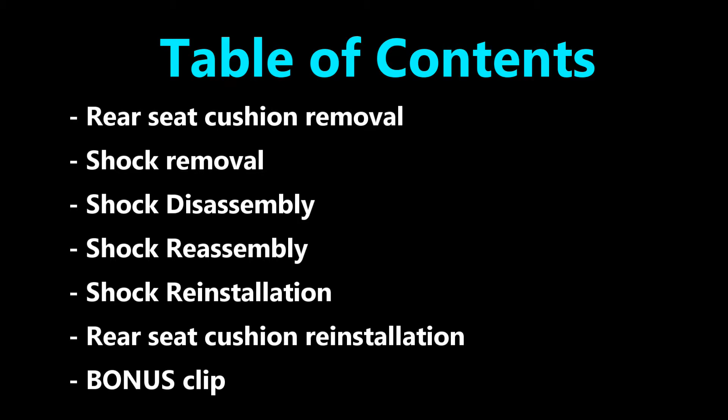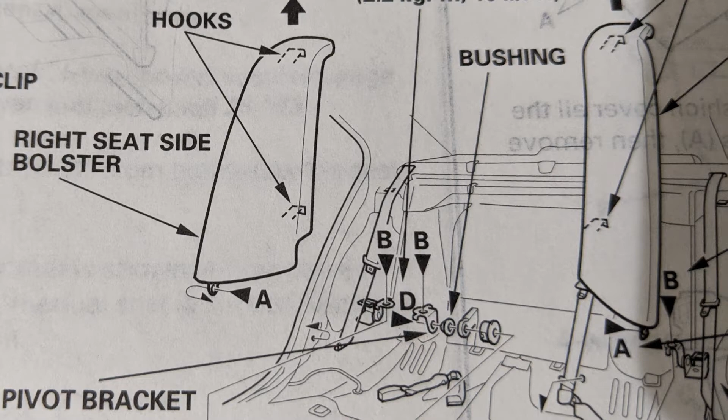With the car on the ground, I started by gaining access to the top of the rear shocks through the back seat. Use a 10mm socket with an extension to reach a bolt near the driver's side seatbelt buckle. Yours may already be removed. Remove the bolt.

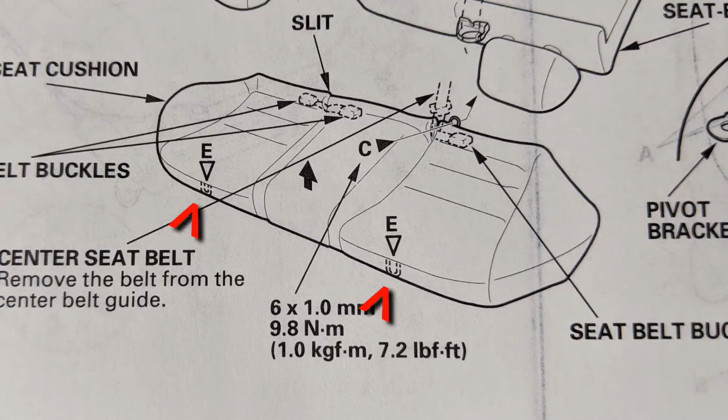The lower front edge of the rear seat cushion has metal hooks that lock into a clip. Lift up to unfasten it. There's one on each side. Now you can lift the whole cushion out of the car. The seat side bolsters have a 10mm bolt at the bottom. Remove it.

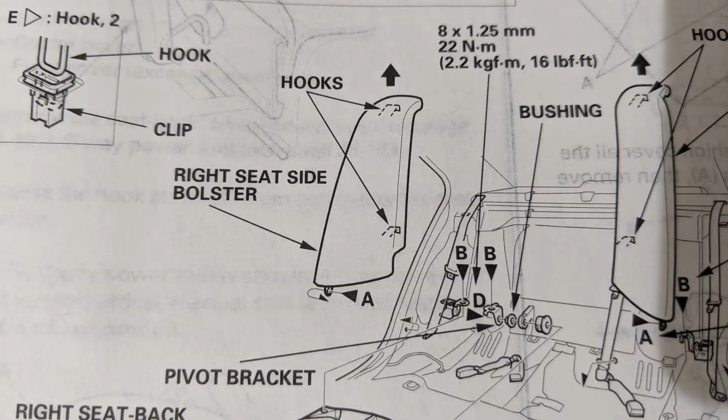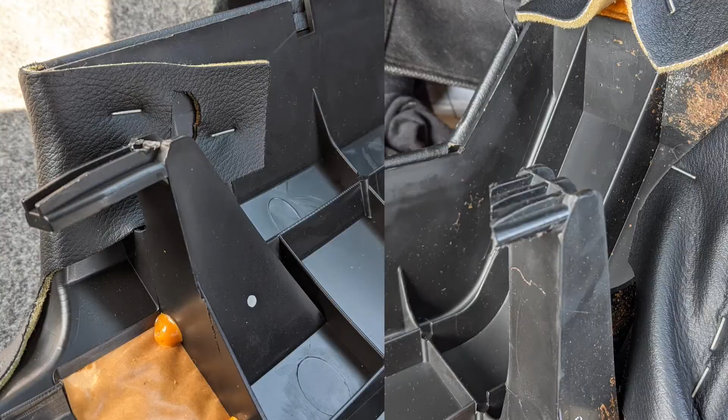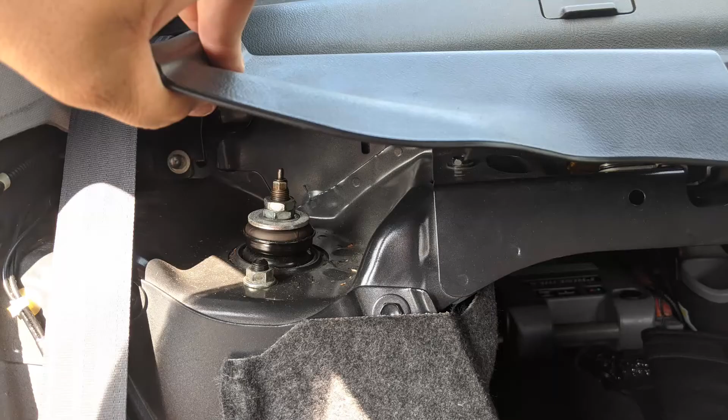Bring down the rear seat backs one at a time. Lift up on the seat side bolsters to remove them. You can't just pull them towards you because they're hooked into some holes. You can see the top of the shocks from here. There are some plastic clips that are holding in the rear shelf. To gain more space to the top of the shocks, lift up on the rear shelf.

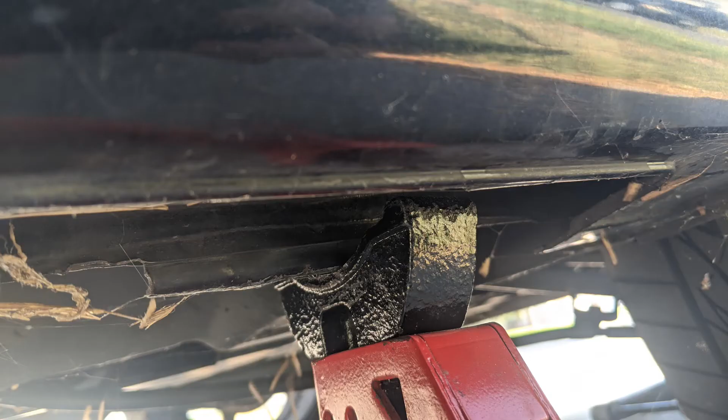It's time to jack up the rear of the car. My car is parked on a slight incline, so I chock the front wheels to prevent the car from rolling back when I jack it up. You're going to jack up the rear from the rear tow hook. Set your jack stands under the pinch welds and remove the wheels.

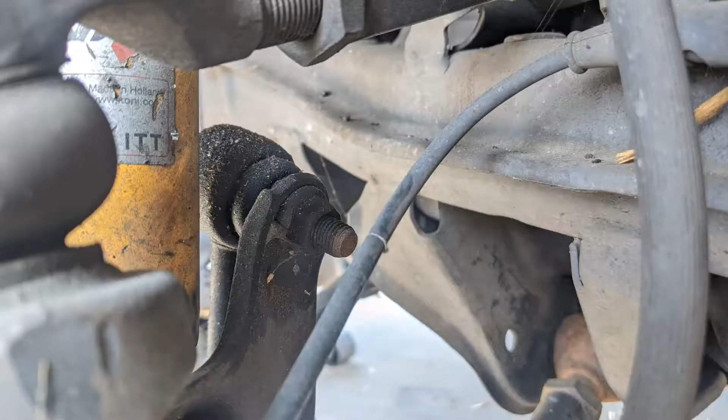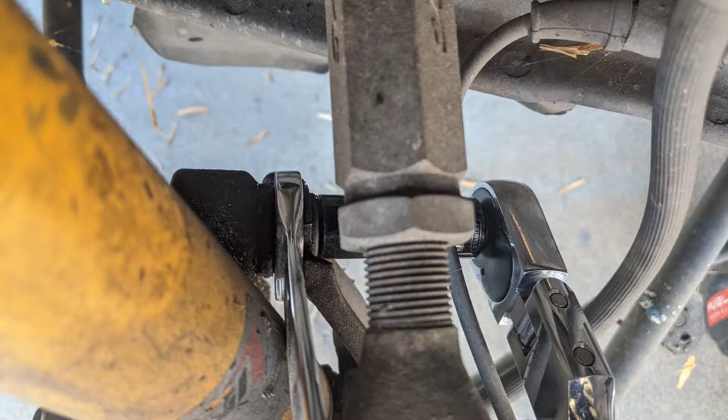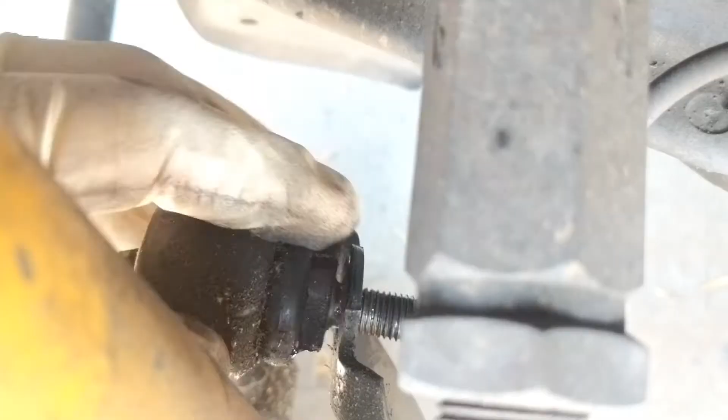The sway bar end links are attached to the knuckle by a bolt. Remove the bolt. For the OEM links, you're going to have to use a hex wrench and a combination wrench. I have Moog links, so I use an 18mm combination wrench and a socket wrench. Remove the nut and pull the end link off. Then move the end link towards the rear of the car.

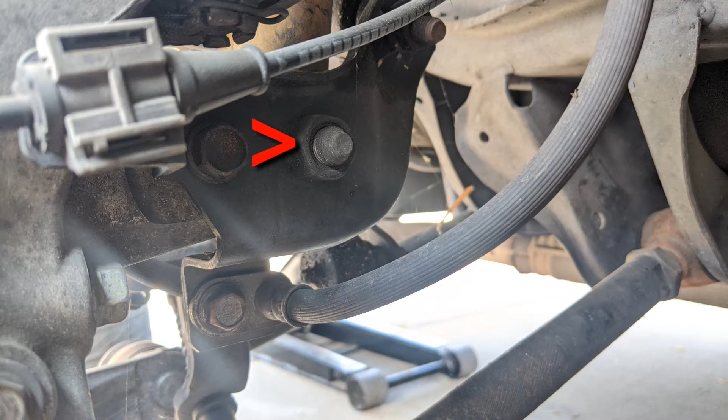The lower part of the shock is held by a large bolt. The head of the bolt faces the rear of the car. On the other side, the bolt threads into a nut that's welded onto the bracket. Use a 17mm socket to remove it. If the bolt is stuck, spin it out with your impact wrench.

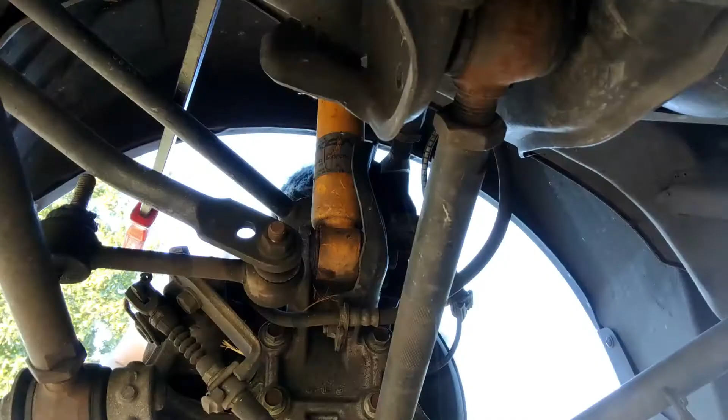The bottom of the shock is wedged into grooves. It can only move up and away from you. So here's the plan. Insert a large pry bar over the rear arm and under the frame. Pry down on the arm and the suspension will lower. The shock will come out of the grooves. Then push the shock away from you to clear the bracket.

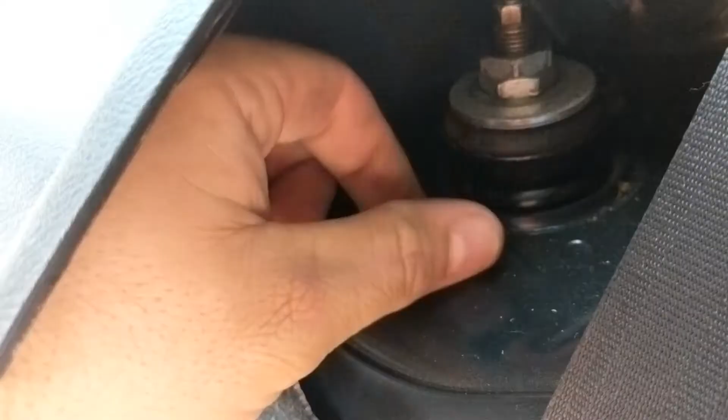At the top of the shock, use a 14mm socket to loosen the top nuts on the shock. But don't remove the nuts just yet. Next, with one hand, hold the shock and lift it up. Then use your other hand to remove the top nuts off the top of the shock completely. Guide the shock straight down. Let it rest if you want to, but don't let it go unless it's secured.

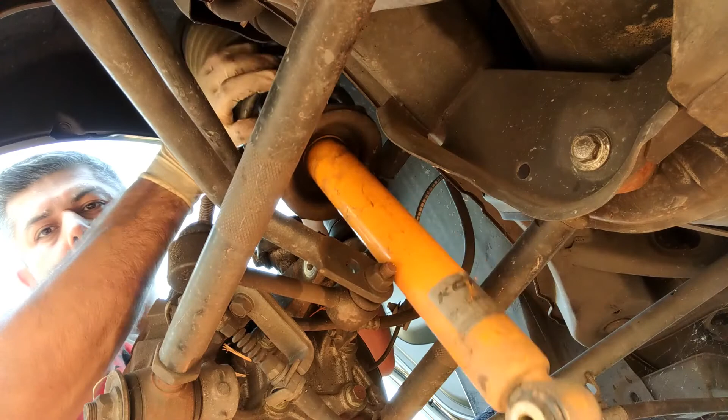To get the shock out of the wheel well, you're going to have to lower the bottom of the shock under the subframe. Then tilt the top of the shock towards you. The top of the shock should now be able to clear the wheel well.

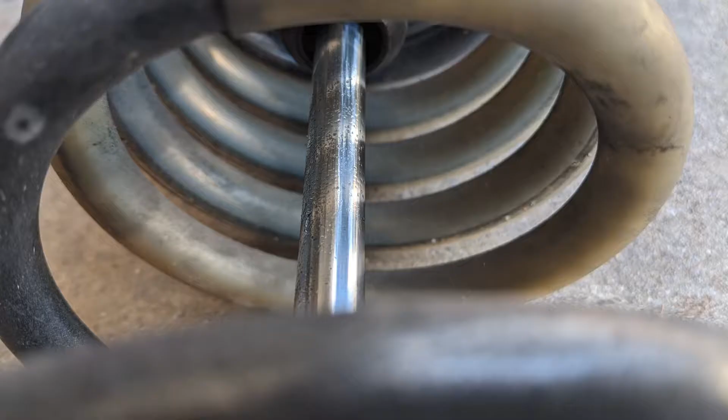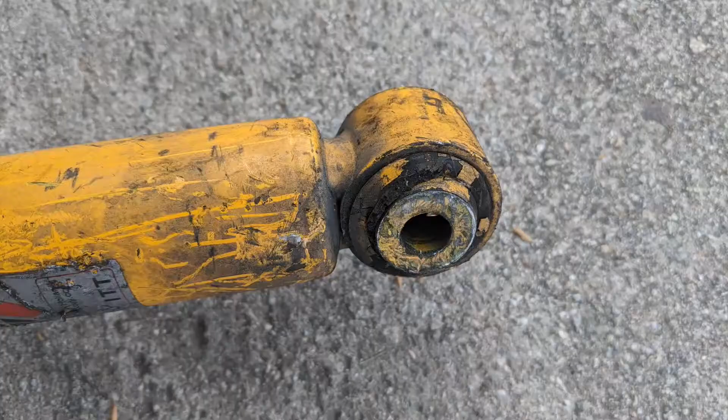Let's take a look at this old shock. It has oil residue on the shaft, oil mixed with dirt on the top of the shock tube, and dirt and oil on the bottom of the bump stop. These are signs that the oil was leaking out of the shock. These are Koni Sport shocks with about 100,000 miles. They're 10 years old.

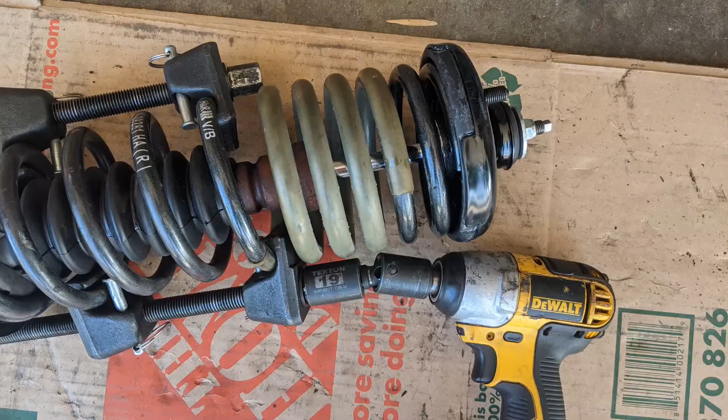Now let's disassemble the shock. I use my spring compressor clamps to compress the springs. Make sure you buy some with the safety tabs. You'll see me use the clamps with the bolt heads facing towards the bottom of the shock, but I realized later it's easier if you face the bolt heads up. Tighten your clamps and keep them opposite each other.

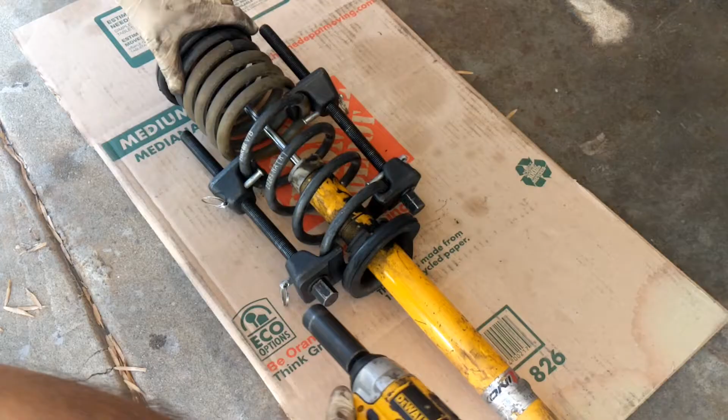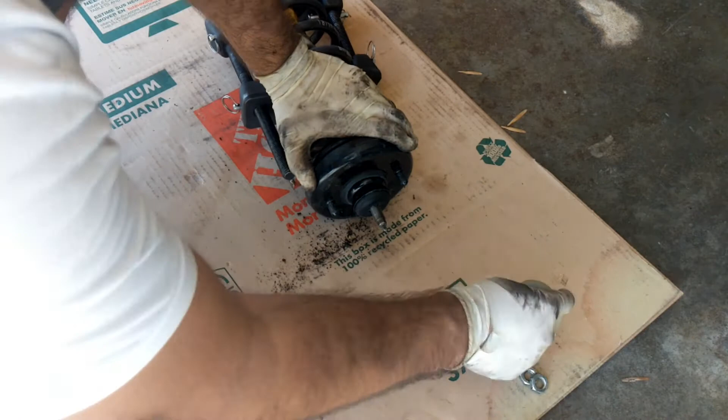Now compress the clamps with an impact wrench, compressing one side at a time. You can stop when the shock moves freely from the spring. Now let's take it all apart. Remove the top nuts. My shock has 2 of them. Remove the top washer. Remove the mounting base with the rubber cushions. Remove the lower washer. Now you can separate the shock from the spring.

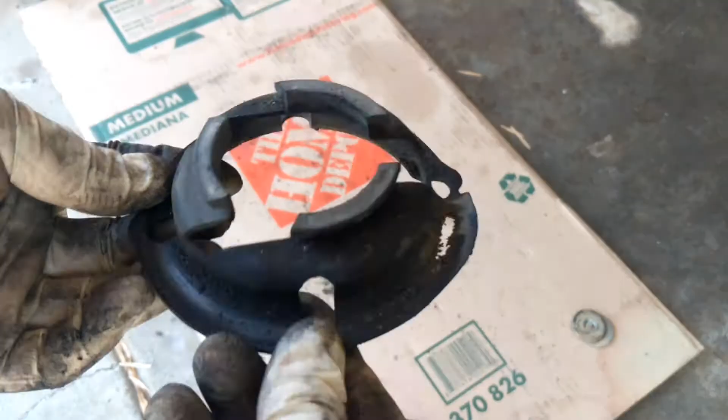Remove the bump stop. Remove the dust cover lower mount. It has some damage, but I will reuse it because I forgot to order new ones.

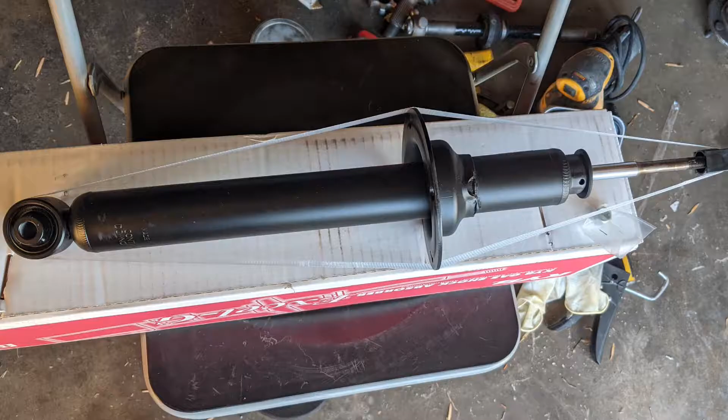Let's use the OEM manual diagram to help reassemble the shock. My new shocks are KYB shocks. Insert the dust cover lower mount. Insert the dust cover. I'm improvising here. I'm using one of the off-roading dust covers that I found on Amazon.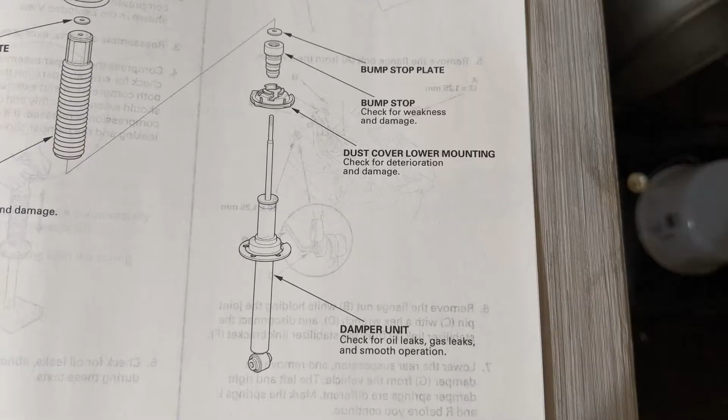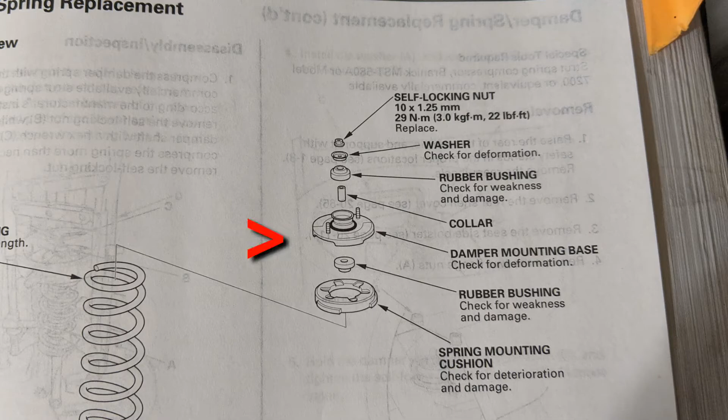Insert the bump stop. Carefully insert the spring and ensure the bottom of the spring sits completely down. Now let's assemble the damper mounting plate with the rubber bushings. Align the circles of the rubber cushion with the circles on the metal mounting plate. The side of the rubber cushion also has slots that you need to align.

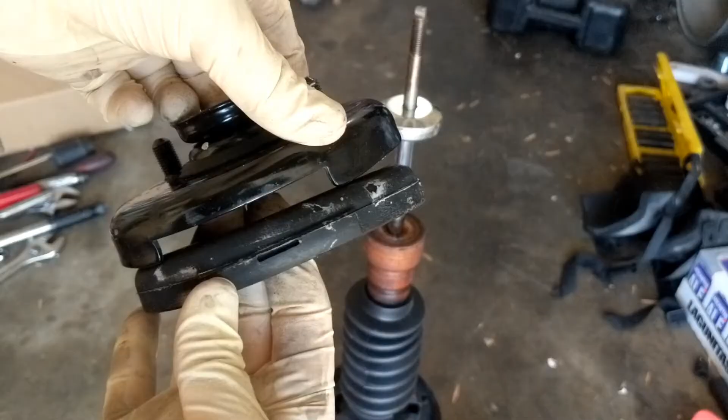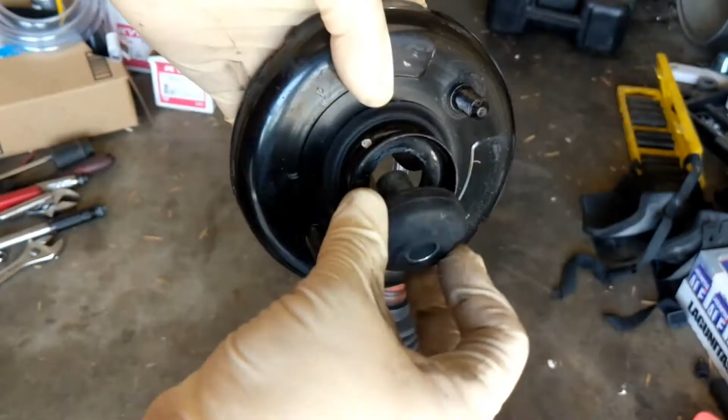Next, insert the collar partially into one bushing. Then insert the bushing with collar in the mounting plate. Now press in the other bushing into the collar. This can be a little bit tricky. Use water and soap to help squeeze the 2 bushings on the collar.

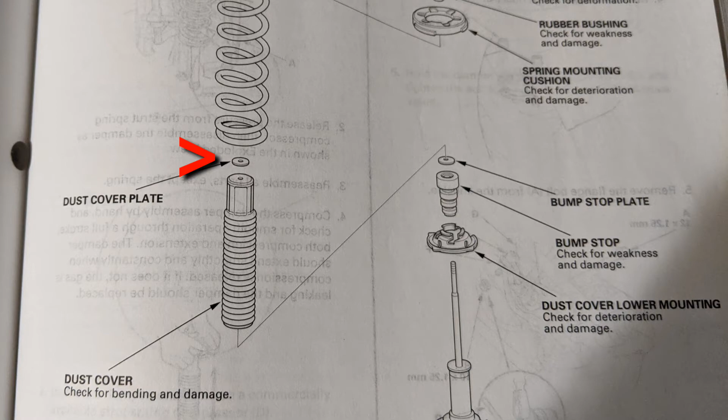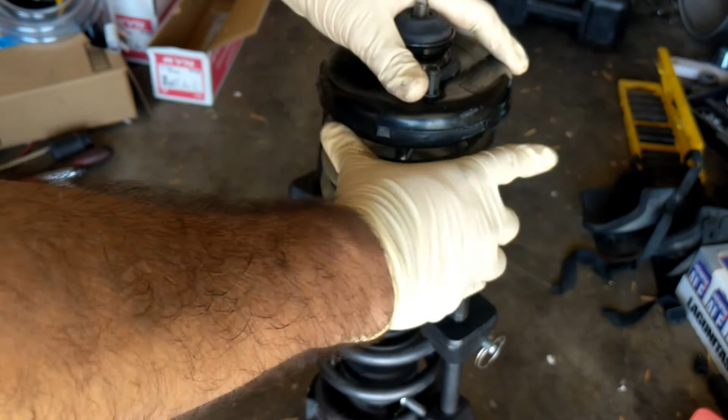The OEM manual shows something called the bump stop plate. Here's the OEM part, and it fits neatly on the top of the bump stop. The manual also shows something called the dust cover plate, which is basically the lower washer. So here's the bump stop plate and lower washer. Then the mounting plate. Ensure that the spring is secured under the mounting plate. Next, add the top washer and finally add the top nut.

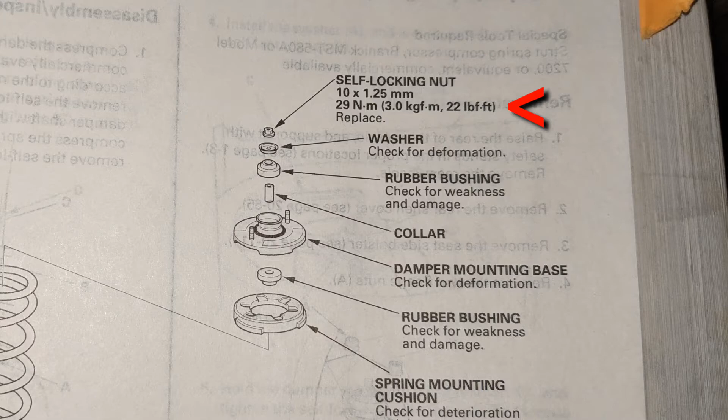On these KYB shocks, you need to use 2 wrenches to tighten the top nut. The manual says to tighten up to 22 foot-pounds, and I did 20 foot-pounds because it bottoms out at that point. I used my crow's foot wrench with an extension and my 3/8 torque wrench. So here's what it looks like torqued to 20 foot-pounds.

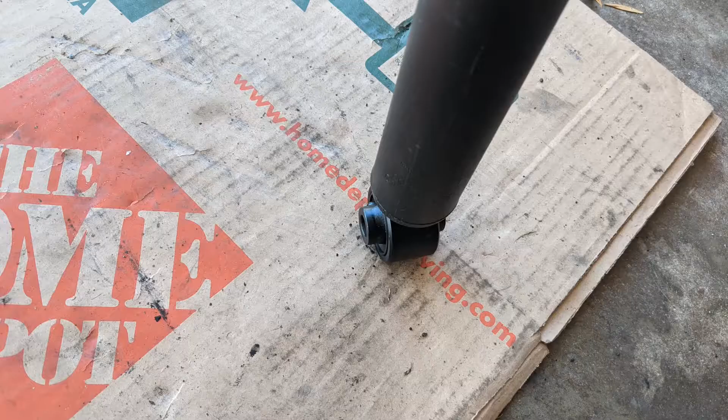Before you uncompress the spring, you have to line up the top mounting bolts parallel to the lower bolt holes. If you don't align this, the shock will not fit back into its place on the car. You can use silicone spray under the mount plate cushion to help it move and ensure everything is aligned.

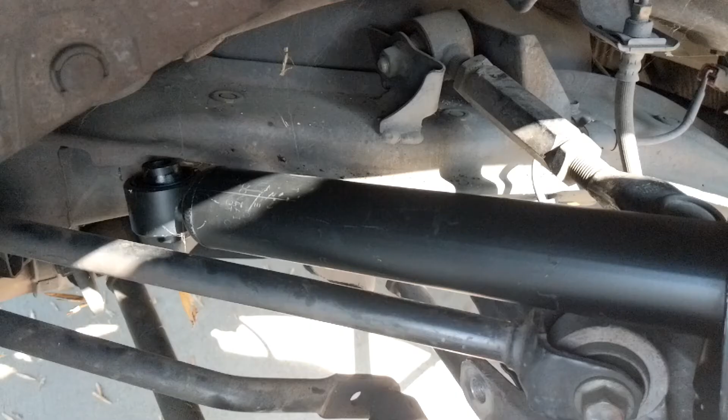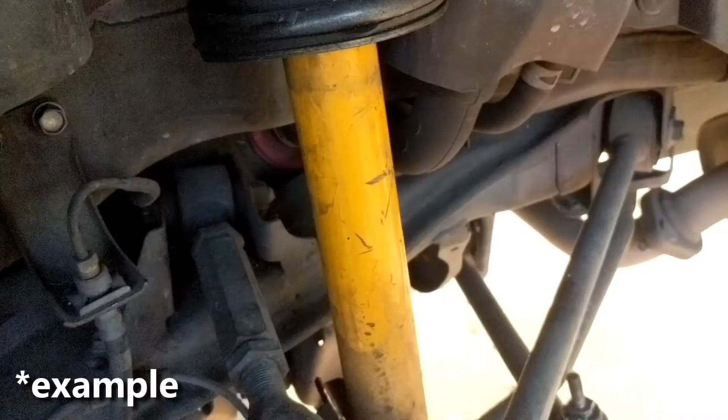Let's go over some reinstallation tips. It's the reverse to get the shock into the wheel well. Tilt the shock at an angle and then insert the bottom of the shock under the subframe. Now lift the top of the shock into the wheel well. Lift the top of the shock to the mounting holes on the car and hold the shock up with your hand while you screw in the mounting nuts at the top.

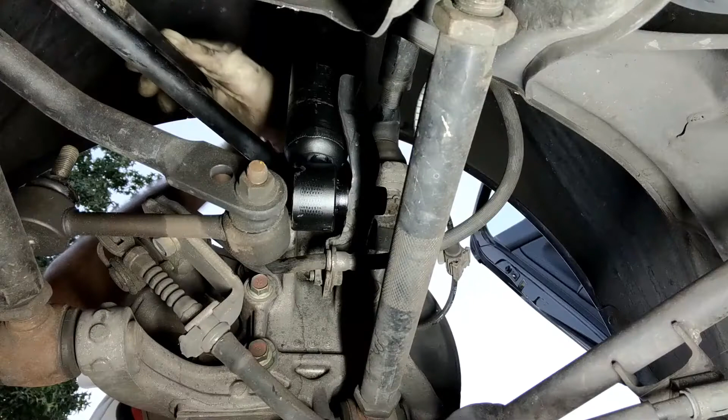Remember, the bottom of the shock needs to fit into the grooves. Use the pry bar to lower the knuckle and then pull the shock towards you and over the grooves and let the knuckle rise by releasing the pry bar. Insert the large bolt to the lower part of the shock. Use a socket wrench to help thread it in, but don't fully tighten it yet. Then connect the end link, but don't fully tighten it yet.

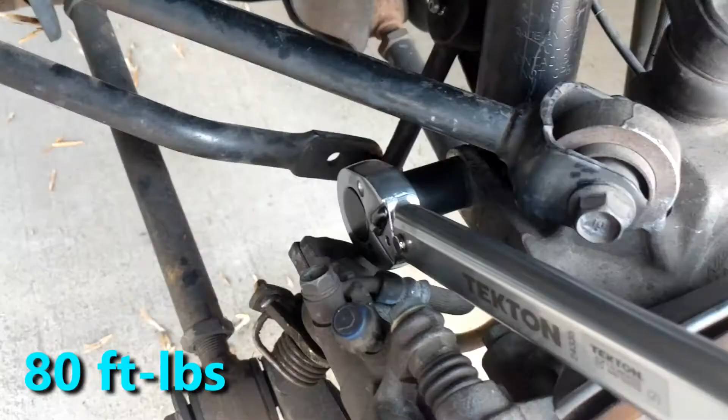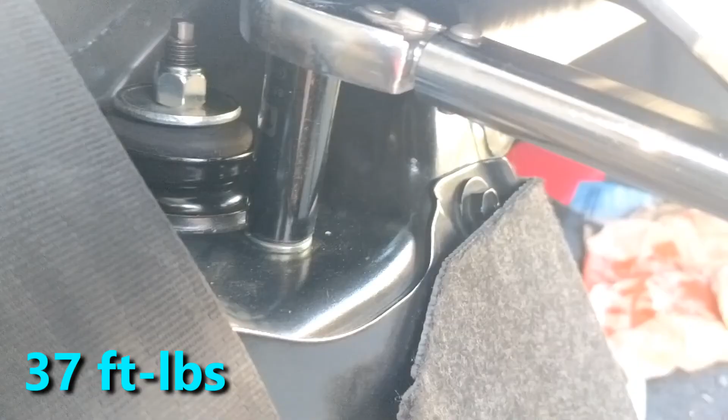Now use your floor jack to lift that suspension knuckle. Now you can torque the lower damper bolt to 80 foot-pounds and the end link nut to 30 foot-pounds. And you can also torque the shock's top 2 mounting nuts to 37 foot-pounds. Now you can lower the suspension with the floor jack.

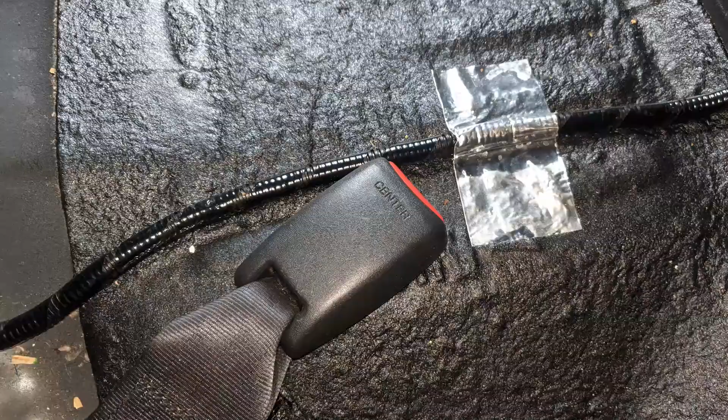When you're putting the side bolster back, make sure to pull the seatbelt so it doesn't get stuck under it. Snap back in those clips on the rear shelf too. The center seatbelt buckle has the word center on it. Don't mix it up with the passenger side rear buckle. Make sure that the rear seat cushion is fastened as you put it back. Listen for the click.

Let's compare the new shock versus the old shocks. Compression should be smooth and consistent going up and down. That's all, folks.